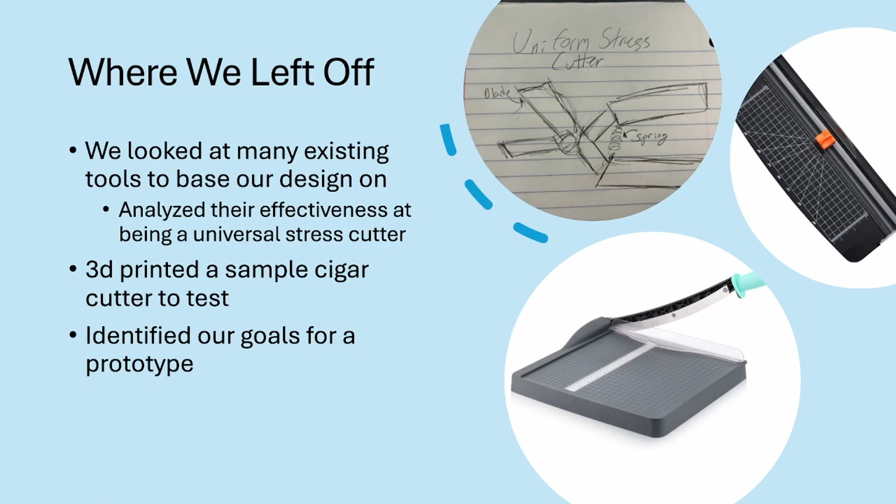We looked at a flat one that only works with thin sheets of paper, which would not work for our project since we were doing a cylindrical object. Then we looked at a larger one, but it had the same issue of only applying pressure onto smaller spaces at a time. So what else did we look at?

What we did not draw from right off the bat was a box cutter or a singular blade design, because that would only come in at one point. It would cut a very tiny point, and they were kind of hard to handle. You'd have to have something to clamp down the item onto in order to get it to cut in one spot consistently.

Also included in there is a rotary blade. A rotary blade cuts as you roll it across, but it only cuts in one small section at a time. It is even for fabrics, but not for cylindrical objects, which is what we're working with.

And we didn't look at any laser cutters or machines that had a lot of intricate electrical work, because we are only a group of 3 for a few months, so we figured we would not have enough time to get anything working with that, and we'd stick with a purely handheld, non-electrical device.

So our previous example, and what we did a lot of testing and brainstorming with, was a handheld cigar cutter. The pros were the fact that it was handheld, which is what we were aiming for, something where you can just hold it and put your cylindrical object through it, and it would create the cuts. And like I said, it cuts cylindrical shaped materials, so it was a good start for figuring out how to cut our objects. The cons were it does not apply pressure evenly.

There was only a singular blade in it that would cut across the hole, and it would come from one section. So while it was handheld and easy to use, it didn't work exactly how we were hoping.

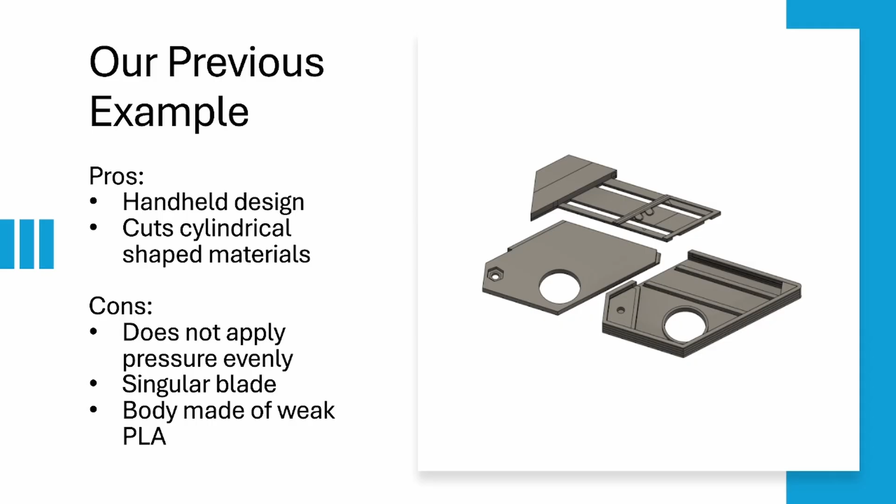So from there, we were coming up with designs and ideas of other things that might have more blades. An issue with this one as well was that the body was made of weak PLA and very thin structures, so as we were testing it, it broke. So our goals were to make something stronger with more blades.

When brainstorming that, we happened to find the 3-blade cigar cutter, and this was very similar to the other one - handheld, and it cuts cylindrical shaped materials just like the other one did - but it has 3 blades coming in at the same time as you close it like scissors, closing the handles together, which would better evenly distribute force. This was exactly what we were looking to do.

The cons were that there was only 3 blades. If we had the ability to add more blades, we could make the force even more evenly distributed. This was the closest we got to what we want our prototype to look like.

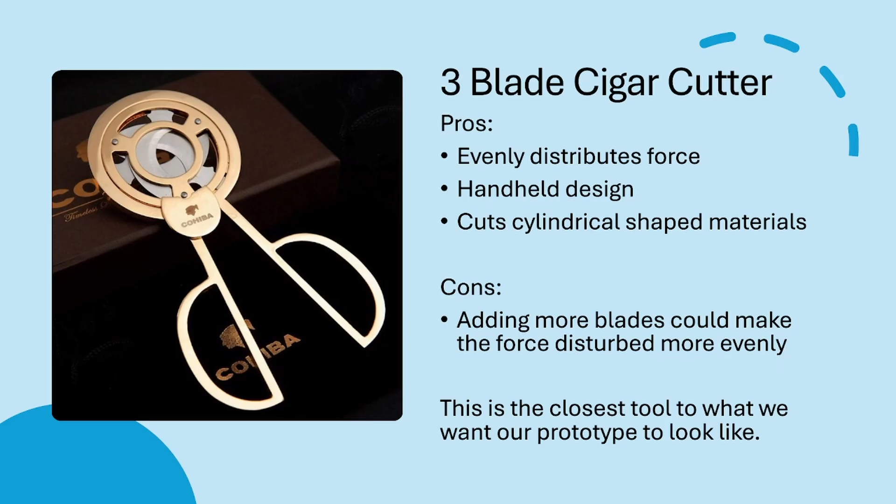Another thing we wanted to add as well was a way to measure how far in the blades came when it snipped off, because you're supposed to do it in one smooth movement of closing the scissors and cutting off the tip of the cigar. So what we wanted to do was create it so we can adjust a little bit at a time and really see where the material breaks off.

Our first prototype, which we displayed at the end of our last presentation, is where we started from. The pros were it cut cylindrical shaped materials, and how it worked was as you turned the handle, it would have a mechanism to bring in 4 blades. With those 4 blades, it would hopefully cut it easier, letting you do a little bit at a time by moving the handle around, so you can really see where it cuts off the material. This would add more evenly distributed pressure than the last ones we'd seen because it ups the blade count. But the issue is we had a lot of difficulties trying to manufacture this.

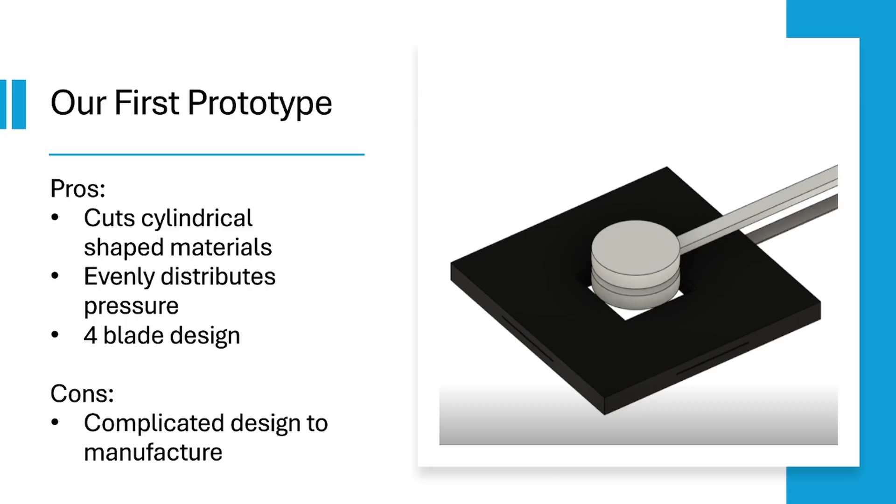From trying to print it out based off what we 3D modeled, to trying to create mock-ups, to figure out where we were going wrong, it just was really difficult to work with. Another issue is since it would cut in the hole in the center and we had the bigger piece there to rotate, it would only cut very thin pieces off of that cylindrical object. So overall, we knew there was a lot of room for improvement, and we decided to fix that.

So our future plans going forward from this prototype were to take what we learned and make a design based off these ideas, aiming to the best of our ability to create a sturdy final product so that we could actually test it and see that it works.

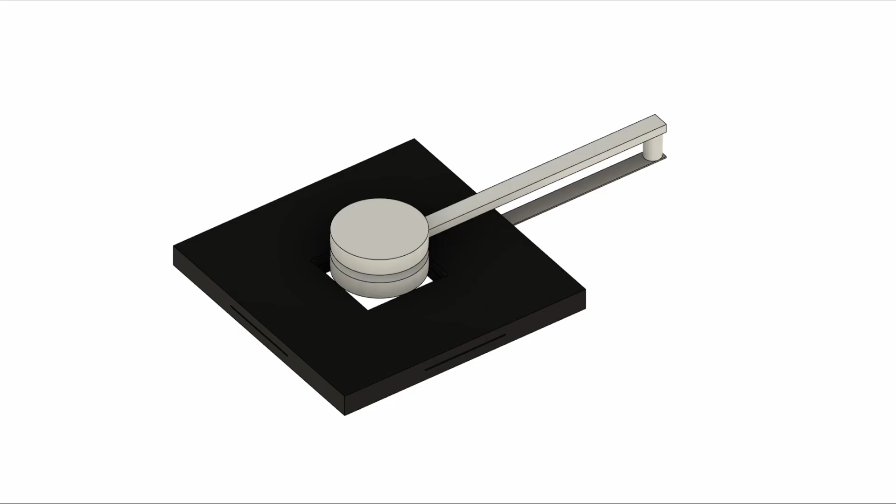So this is the prototype that we started this half of the semester with. It's a very simple design since we were trying to keep it easy to manufacture and prototype, although we did run into many difficulties with that.

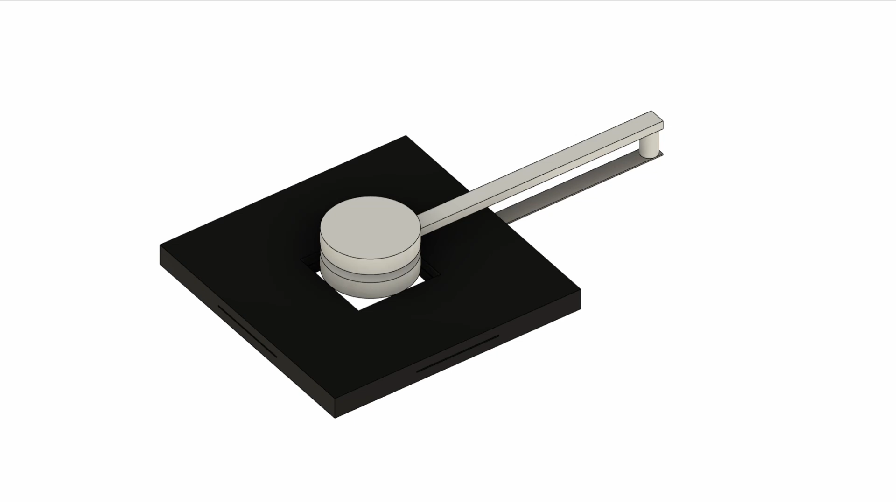Starting off our design, the circle on top is a crank that, as you turned it, the blades, which are attached to the arm you see there, would turn and move in. The black square part is the housing for the blades, which we made out of plastic because it doesn't need to be crazy strong; the housing just keeps the blades from touching you, and the center part is where you would enter the material.

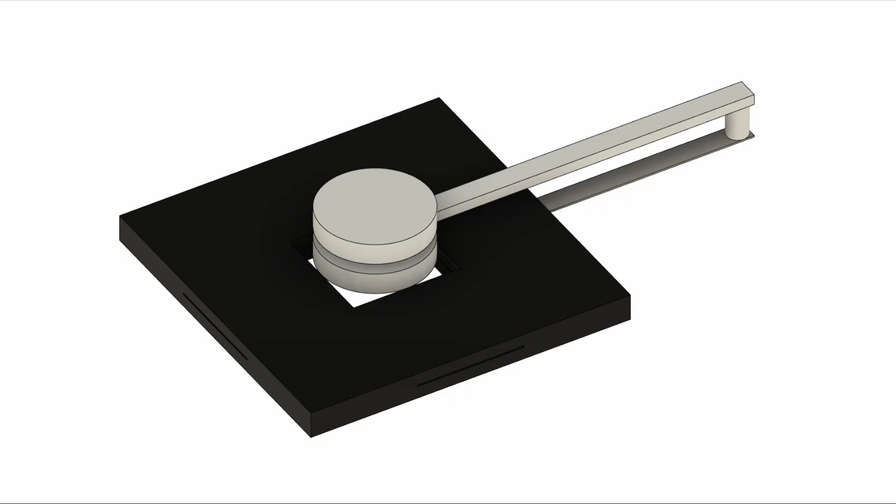We were also struggling with finding clearance, since you could only cut maybe a centimeter off of each material. That was part of our struggles here, especially with the hand crank and everything—we were struggling to be able to hollow it out and still have it work just fine.

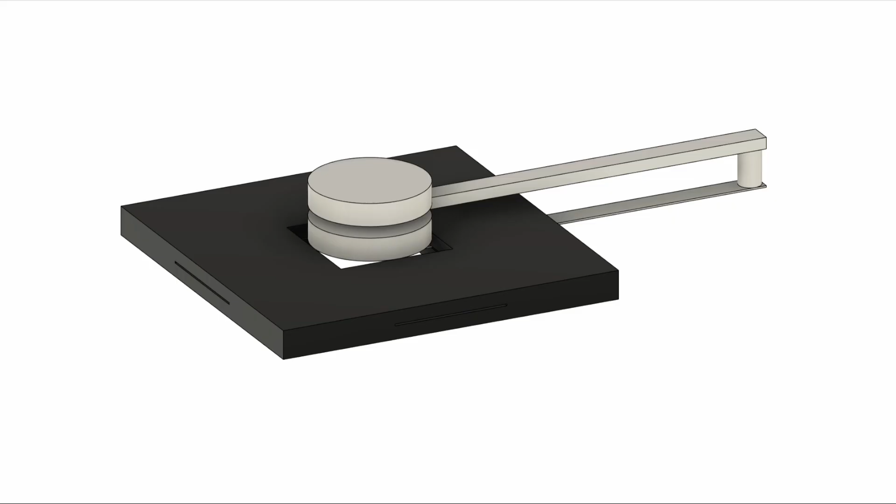A lot of this we were changing, just having a base design so we could build off that and start our prototyping, but none of it was really fleshed out, so we don't really have any pictures to show you guys. With this, the arm was way longer than it needed to be, just so you could easily see how the mechanism was supposed to work.

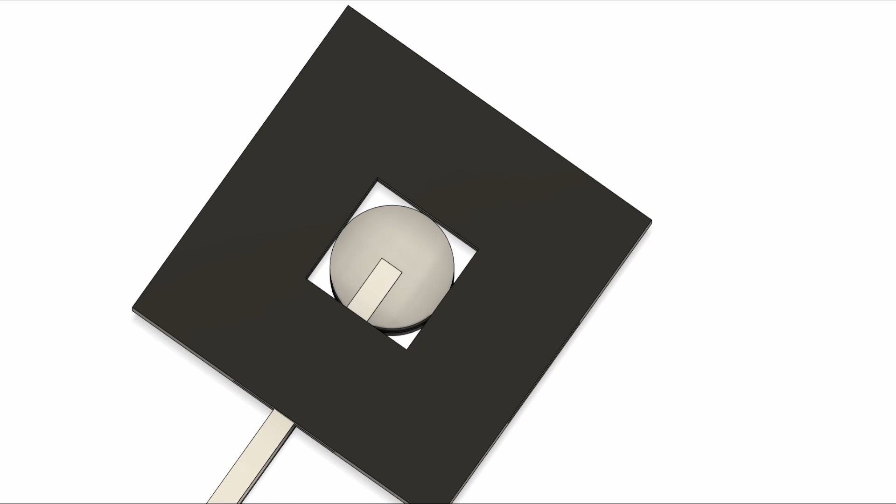The arm would have a plastic piece that holds the blades in place, with 4 of them attached to the crank. As you turned the top part bit by bit, each of the 4 would slowly make their way in and more uniformly cut the material. While the arm would be shortened, so would the edges of the square—it could be rounded off into a circle to be easier to hold, easier to use, and nicer to look at.

With this, we were really just getting a rough idea out. That's exactly what this prototype was, and we used it a bit for inspiration going on to our next portion of the project, but it kind of was its own thing where we could live and learn and figure out where we were going from there in the prototyping process. That is exactly how we moved on to our next prototype, which we'll show you in a second.

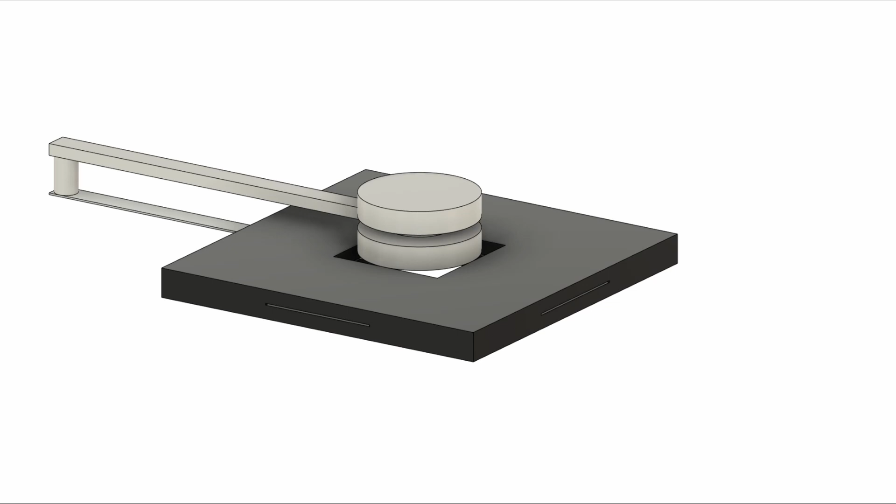At the time we were working with this idea and believing this would be our final project and final part of the project, we discussed the materials we would make everything out of.

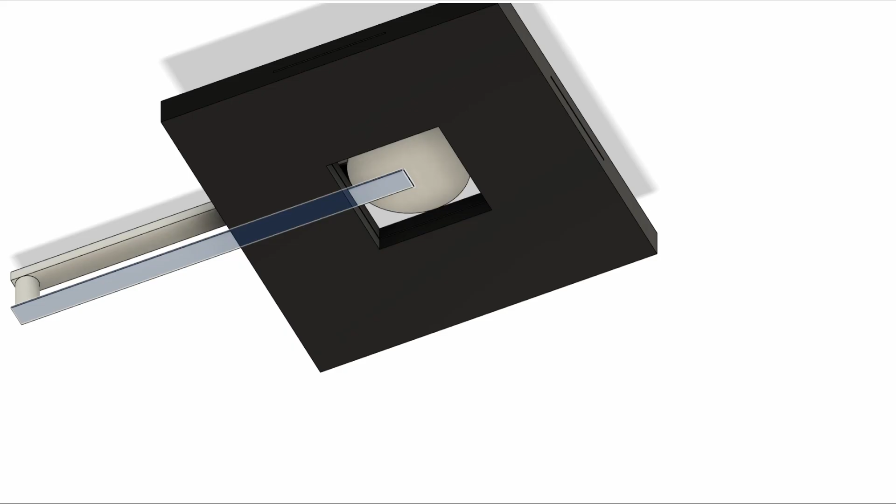The black portion would be a thinner, but not too thin, plastic since it didn't need to be very strong - it was only there to prevent you from cutting your fingers. The crank and the portion holding the metal blade, however, we aimed for a stronger plastic, even debating reinforced carbon fiber to make it as strong as possible with the materials we had, since we have access to carbon fiber filament.

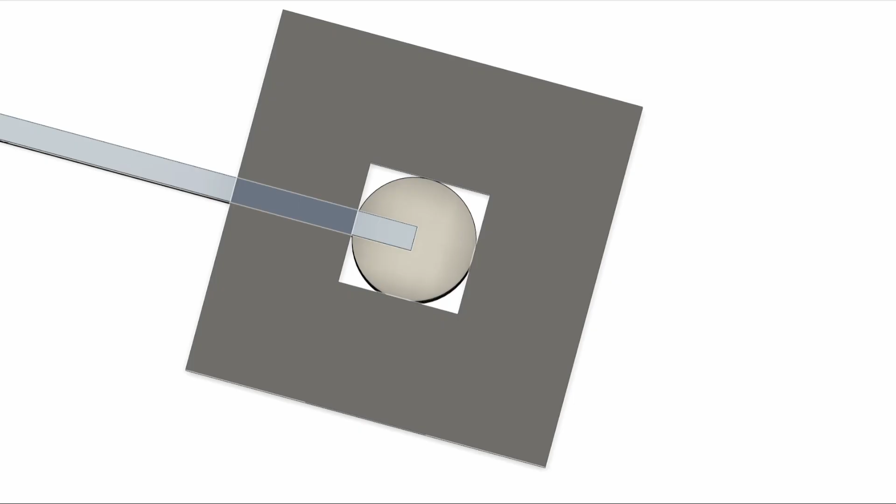The goal was to have a 4-blade cutter, and we ended up moving on to a better design that even fit into 5 blades - I'll head over to that - and one that wouldn't break as easily as the cigar cutter did.

Our timeline after the last video was: week 4, continue designing that prototype and tweaking it; week 5, manufacture our final prototype; and from week 6, test and refine the final prototype to make sure it works.

But as with all projects, it didn't go to plan. For week 4, we were finishing up the designs of that prototype I just displayed, and it just would not work - we could not get it manufactured. We tried our hardest to produce it, even physically with cardboard and whatever we had, but we could not get it to stay.

So towards the end of week 4, we really had to start developing our new prototype, and that lasted into week 5. In week 5, we had our new prototype we were working on, and only started manufacturing towards the end of week 5 into week 6. As we reached week 6, that's when we were really finishing up the design and manufacturing and making sure it worked.

Our final design is this gear mechanism, which allows all blades to protract and retract simultaneously along the tracks shown. They all go in and out with the gear mechanisms as you turn it with your hand, and there's a hole in the center where the cylindrical object would go to be cut.

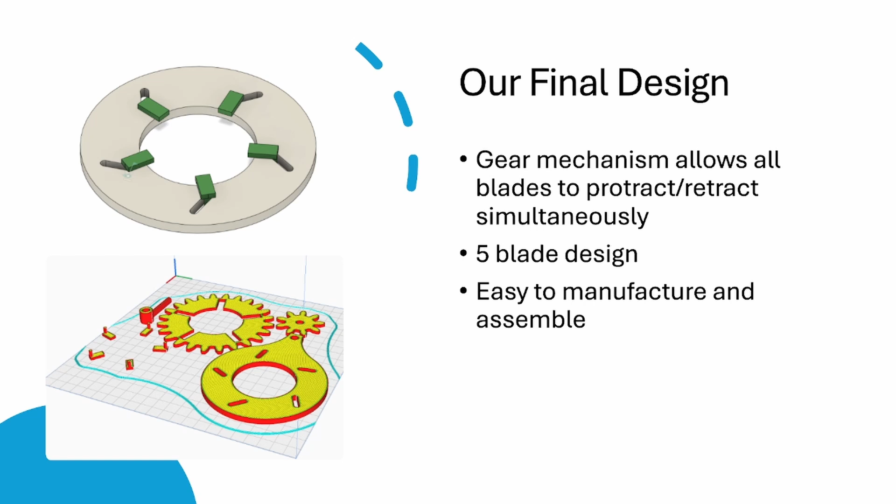This, especially compared to the last prototype, is very easy to manufacture and assemble. We were able to get this done in time.

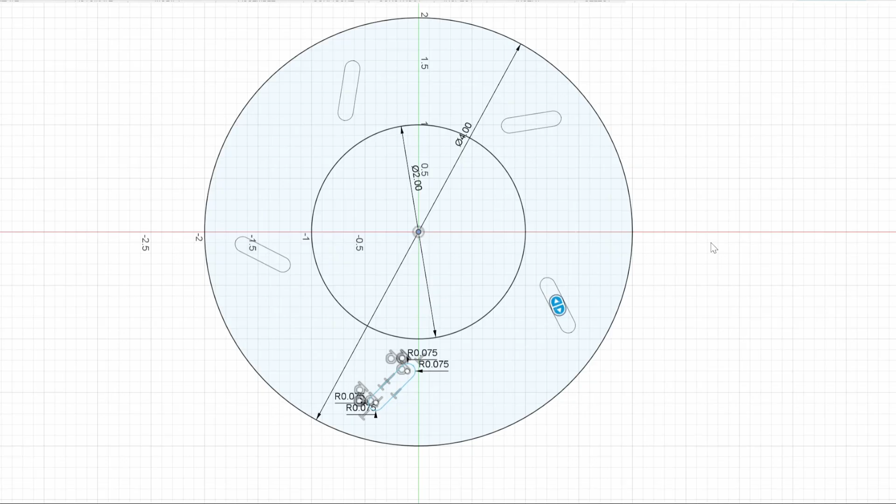Here we will be showing our final design and how we designed it in CAD, starting off with the base of the product.

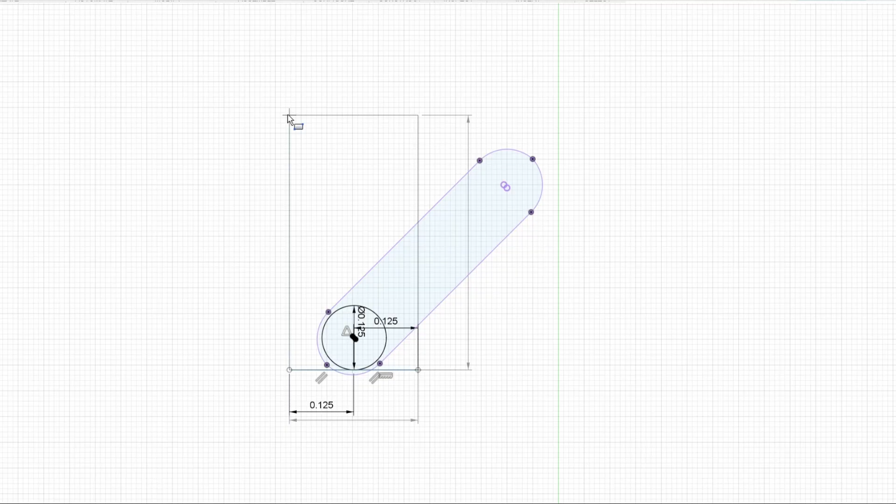Right here you see where we start to add the tracks and the mechanisms to make the blades go inward. And you'll see, as we're designing it, we find out how to make it visible and workable on CAD as well.

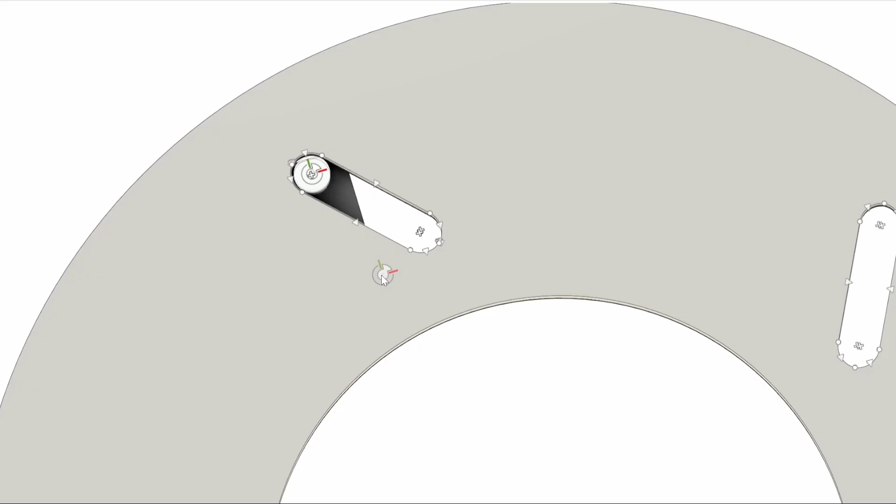As with all CADing, what you'll see here is it takes a lot of trial and error to get it to work out perfectly.

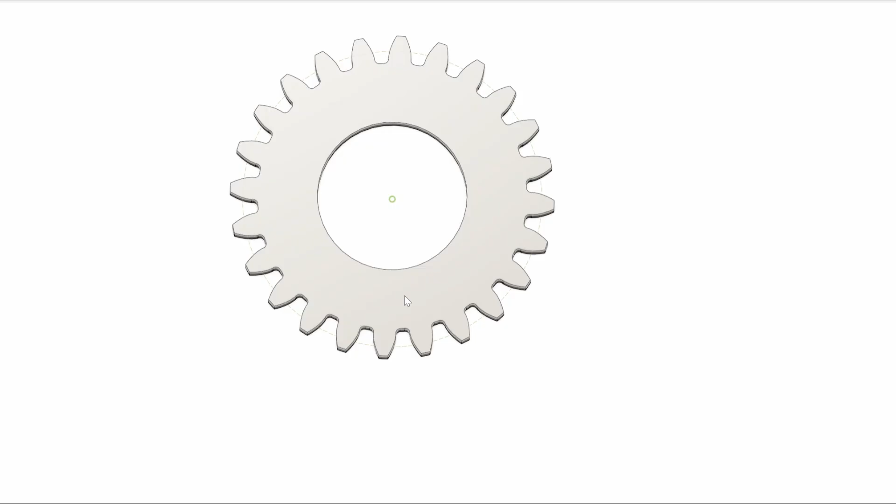Right here you'll see is where we try and get the gear working, showing how we turn the mechanism with our final product.

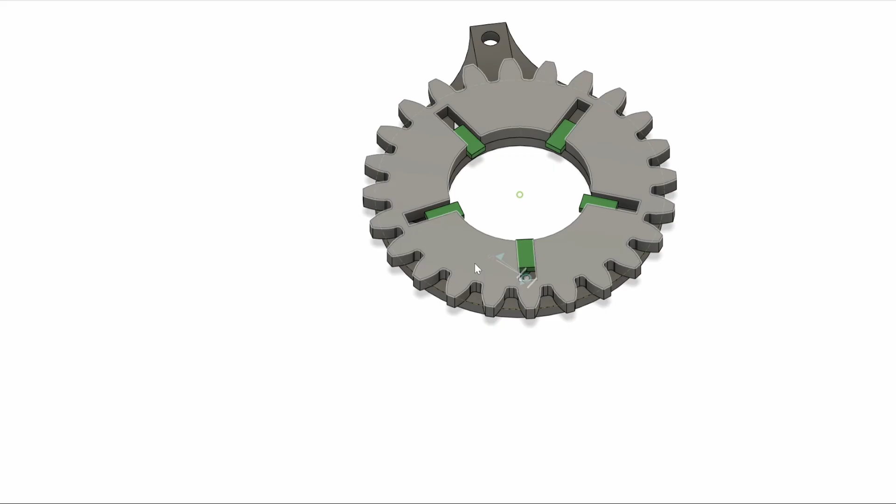And here is where we start adding in stuff for a hand crank so we can easily adjust and see how far the blades go in for this product.

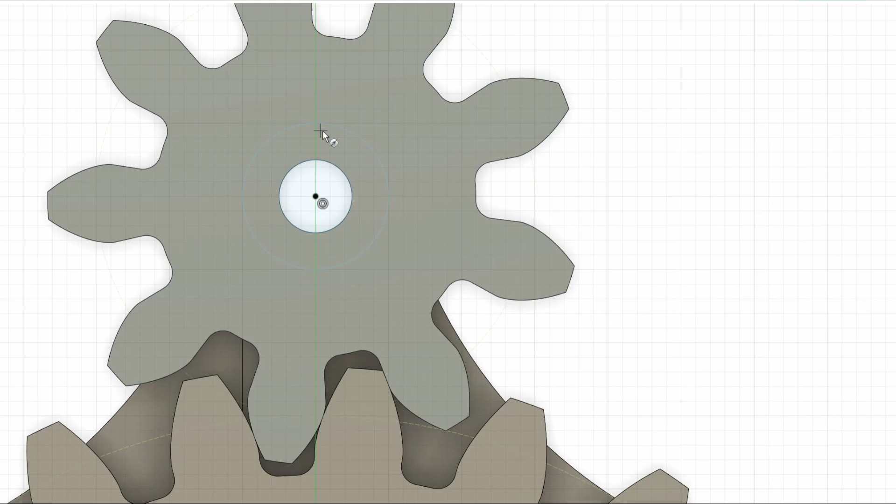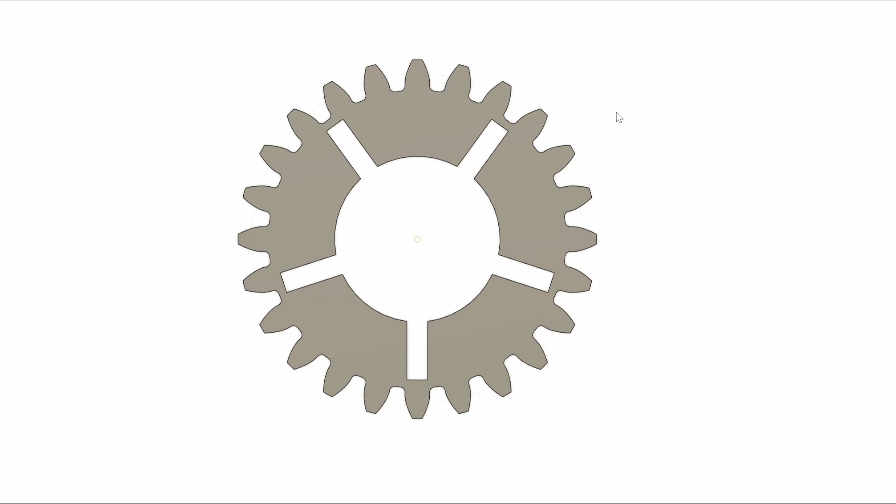Here is where we're adding in a second gear to get the hand crank to work. The gear is attached to the hand crank, so that leaves only 2 gears in this whole process, and it makes it a fairly simple product to manufacture.

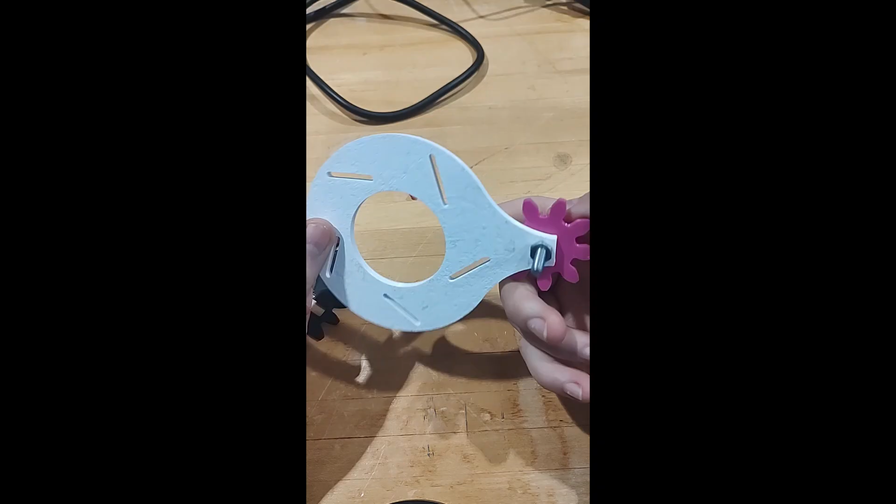Alright, so what we have in front of us today is our disassembled but completed final design, for now. What we have here are these slots - these are our dummy blades for safety reasons as well as school rules.

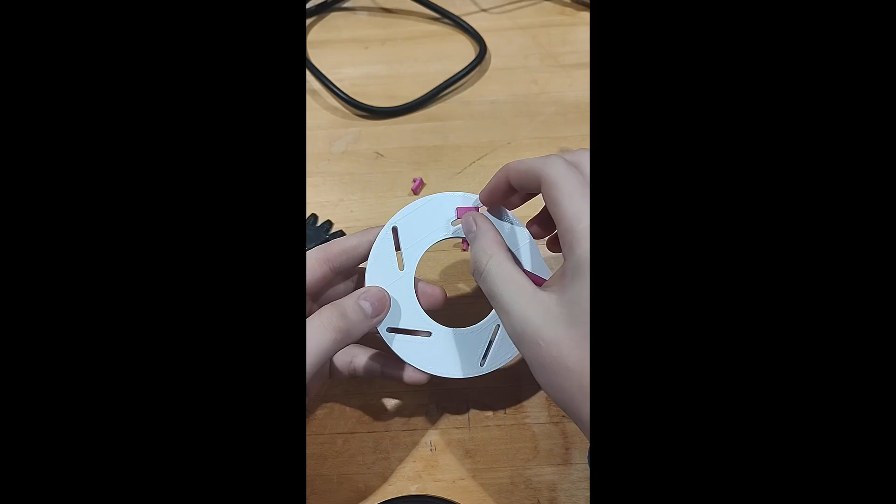These blades here slide in these channels. They have a peg on the back of them, which you can see on any of them here. This peg holds them in the channel so they can slide back and forth like so.

As you can see, when they're all the way back here, the dummy blade is not in contact with the hole whatsoever. When they slide in like this, they are in contact with the hole, so they can cut something of this rough diameter.

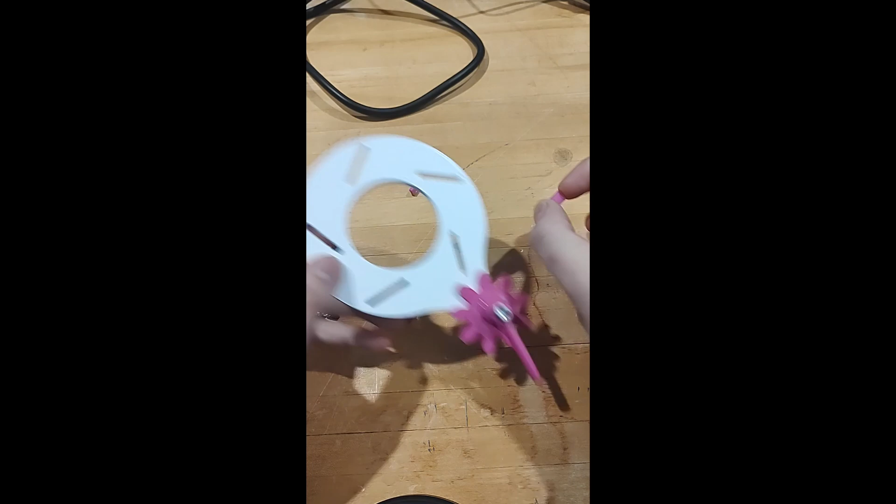These blades can be exchanged for any length depending on the need of the material being cut. They slide through these channels in and out via this gear right here. This black gear works with this pink one on the side here, and it rotates itself around.

So when there is a pink dummy blade, or a real blade ideally, in the slot, you move it like this and it slides through the slot, which I could demonstrate by putting in a pink dummy blade. You can see it's in the slot right here, all the way at the back, and then I rotate this like this and it's out.

So this, you can see the gear kind of comes unaligned towards the back here, how it's way out here but not even touching here. This is because I don't have all the dummy blades in right now. This is just so I can demonstrate for you.

But it's very easily disassembled as well in case you want to swap out these dummy blades. There are more covers for it that can be added, but for demonstration purposes they are not on here right now. The bolt right here is long right now, it can be used as the handle if you'd like.

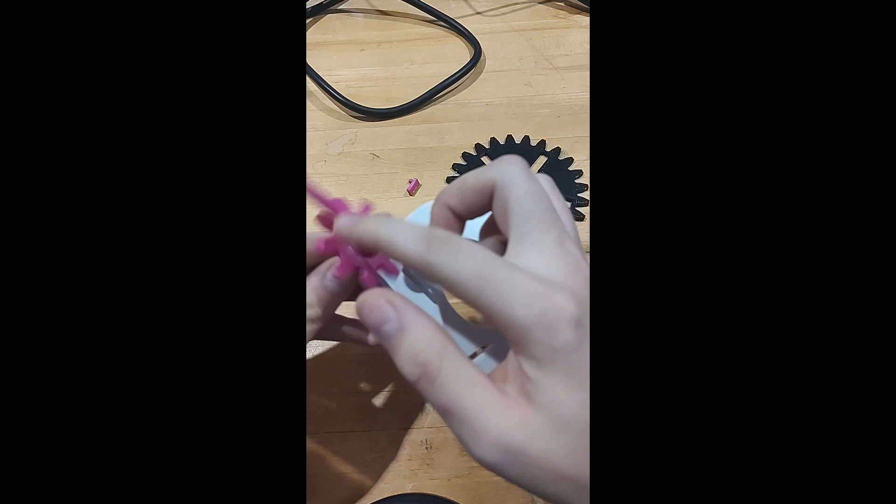However, in the future we do plan on adding in the extra handle on the white. That way you can hold it and rotate it without getting your hand in the way.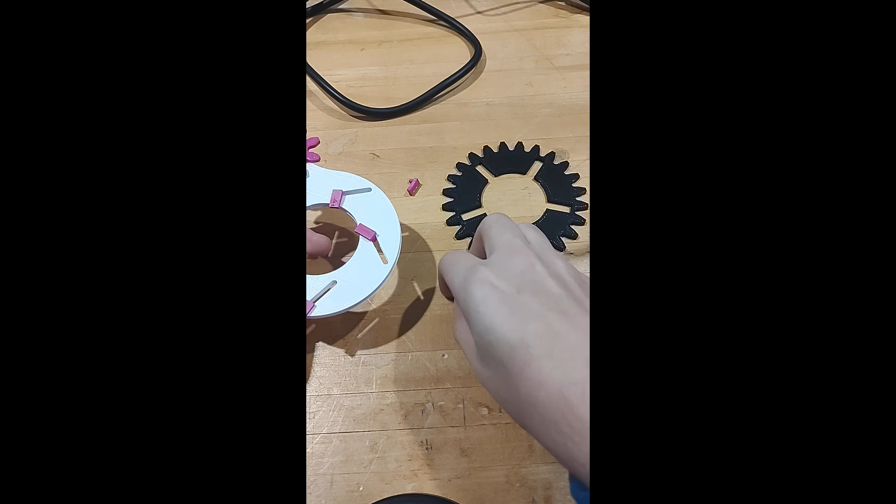But when all 5 of these dummy blades are on here, they move with that gear. Putting the gear on is a bit of an alignment hassle sometimes after you change out these dummy blades for whichever new lengths or strengths you would like. That is also something we would look to edit in the future. But for right now, this is a pretty good uniform stress cutter design.

So you can see here when they're all in a rough position, you can take your black gear and line it up roughly with the pink dummy blades, and then once all 5 of them line up - we've got 4 of them right now - once you can get the 5th one to line up...

A few moments later. Now users may also find it easier to put the blades in after this black gear has already been set on it. However, it is all up to user preference.

This black part also does not need to have the teeth all the way around. That does, however, make it a little bit easier when you're assembling it to line it up with the teeth up here, because it does not matter where this gear is rotated around. So I could set it on like this, or I could set it on over here, and it does not make a difference as to usability. Just a more generic lineup, but it's all up to user preference.

If we were to make this producible, like I said, the same way you could interchange the dummy blades with real ones, obviously, you'd also be able to interchange this.

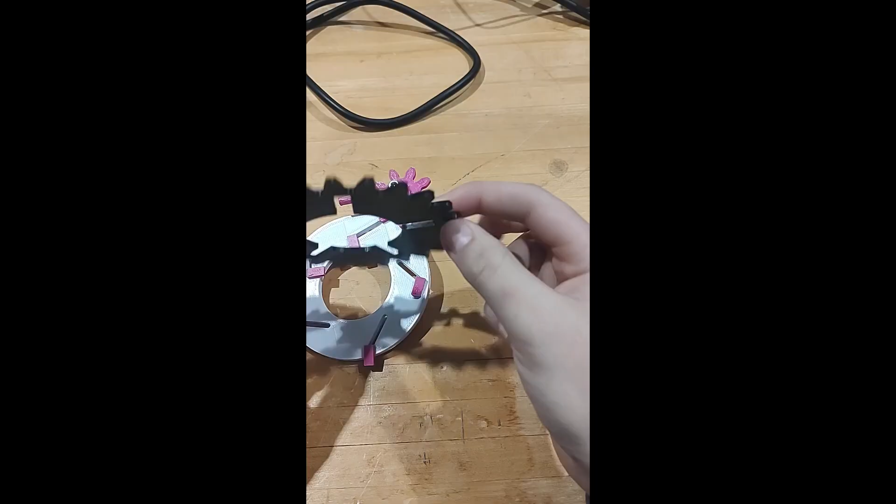Important note about this is the tolerances are very wide on the spots to fit those dummy blades, because the ones that would ideally be made out of metal would take up a little bit wider of a platform, and also it makes it easier for demonstration purposes for me to be able to take it apart and put it back together with these wider tolerances. But that is why you see a little bit of the jiggle when it is assembled.

So this gear right here is just, it has a handle attached to it, this pink part here, so it can rotate around like this, and then you can do it with the handle.

If this were to be produced out of the stronger materials that we would like to, then we will have measurements on here so you can see exactly how far you have to rotate this gear, or ideally how far these dummy blades or real blades in the real scenario have to go in before your material breaks. For a lot of materials that will just be the thickness of the material, but for some it might be sooner, maybe it shears a little bit quicker depending on the material and its shear strength.